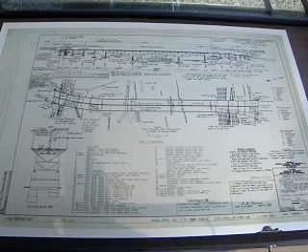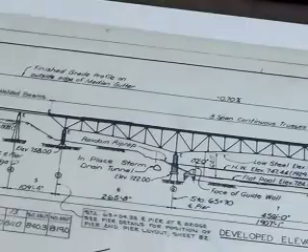When planning for the I-35W bridge got underway in the early 1960s, the Highway Department assigned it the numerical designation of bridge number 9340. Agency records relating to the structure are all keyed to that number. In the MHS collection, we hold the plans for the original construction of the bridge, as well as plans relating to repair work in 1977. These are historical documents which may not reflect design alterations or changes that took place over time. MnDOT continues to hold all of the official records pertaining to the bridge.

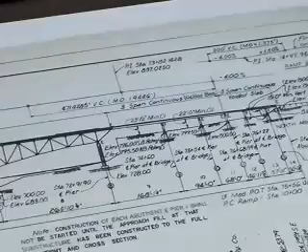Sheet 1 of the 1964 set of plans shows the general layout of the structure, including a top-down roadway view and a drawing of the side elevation. The bridge was designed by the firm of Sverdrup and Parcel and Associates of St. Louis, Missouri. It featured 14 spans, 6 on the approach from the north, 5 on the south, and the 3 central spans across the Mississippi River. The bridge, which opened for traffic in 1967, was about a third of a mile long at 1,907 feet.

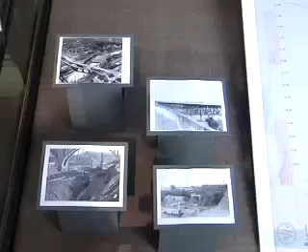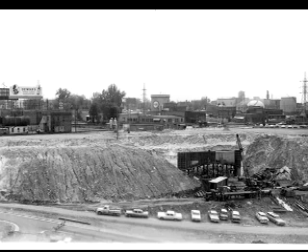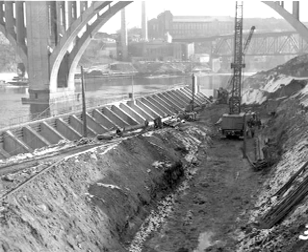Work on the I-35W bridge commenced in 1964. The Highway Department documented the areas on the north and south ends through a series of photographs taken in 1965, which complemented site notes included in the plans. Construction photos were also taken, as well as a short movie showing the main spans being built across the river simultaneously from each bank. The bridge piers for the main spans were built first under a contract with Hercon Incorporated, an industrial construction company, followed by the rest of the structure beginning in 1965.

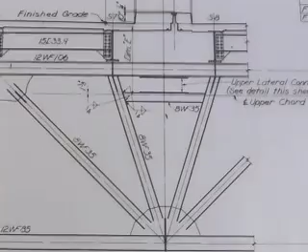The main spans of Bridge 9340 feature deck truss design where all of the supporting members or beams of the bridge are underneath the roadway. Steel gusset plates connect the beams together and provide bracing for the structure. Rivets, bolts, and welds served as connectors. The design followed the 1961-1962 standard specifications for bridges put out by the American Association of State Highway Officials.